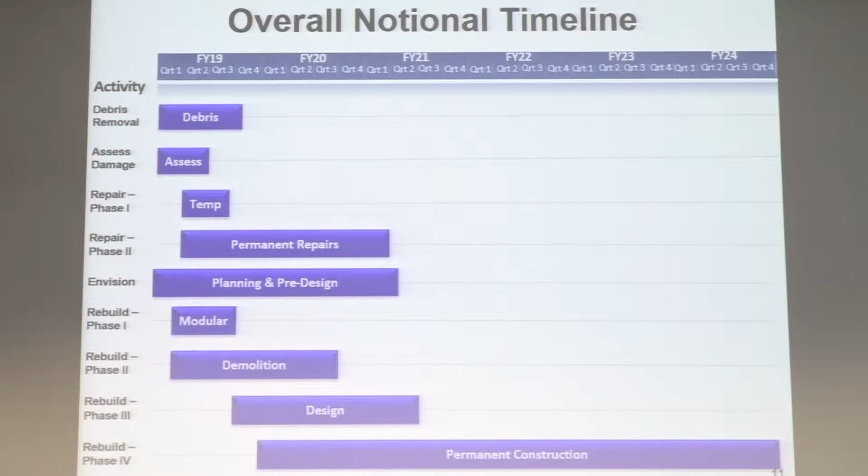So how are we getting to all those missions Colonel Laidlaw talked about so quickly? We had some great response. I'll tell you, I see General Williams down here talking about what the first Air Force people did in the early days after the storm. He and I have been up on some high roofs, 2-story roofs in the AOC, to take a look at the damage ourselves. But it's getting out there and getting some temp facilities in place.

The Corps of Engineers through the Mobile District has been a partner hand in hand. We've got more modular facilities showing up on the base. The first round is about 62 units. We've got another round coming in - rounds 2, 3, and 4 - as well as we're looking at some unaccompanied housing, and I'll talk about that a little bit more later.

For the next 2 years, we're going to do permanent repairs on some facilities. There's a lot of uncertainty still as we master plan about how many millions of square feet, but give or take, we've got about 4.2 million square feet on the base. 1 million of it's under permanent repair, and I'll talk about what that means today. But that's not done because there's still some work to do there. We think a lot of that's going to happen through the O&M realm, and I'll talk about what I think those numbers are today.

As we roll out, and you'll hear Amy Vanderveer talk about what the master plan envisions, we think that effort is already started, but that's probably next year or two, getting some of those designs in place.

One of the nice things about the Air Force Installation Mission Support Center and the Air Force Civil Engineer Center is with our global perspective and our ability - we call it the enterprise - we already have the expertise, and we're building F-35 facilities. We've been building them now for probably 5-6 years around the Air Force. We've got bed downs ongoing up at RAF Lakenheath, and construction going on in the winter up in Alaska. But we cannot use the same facilities we built up there down here.

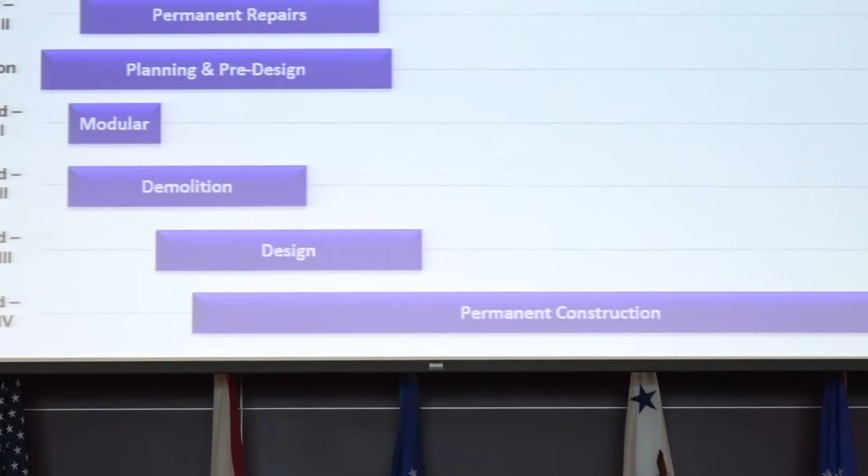Additional modulars, as I mentioned, we're trying to get those in place because today we relocated. We're working out of what used to be the Airey NCO Academy. They've relocated for a short period of time, but they want to start class again in about 18 months, so that means we've got to get that building repaired. The roof is leaking - every time it storms, we get a different place, we patch it, and it comes up someplace else. But we're moving into our new digs probably the next month or so.

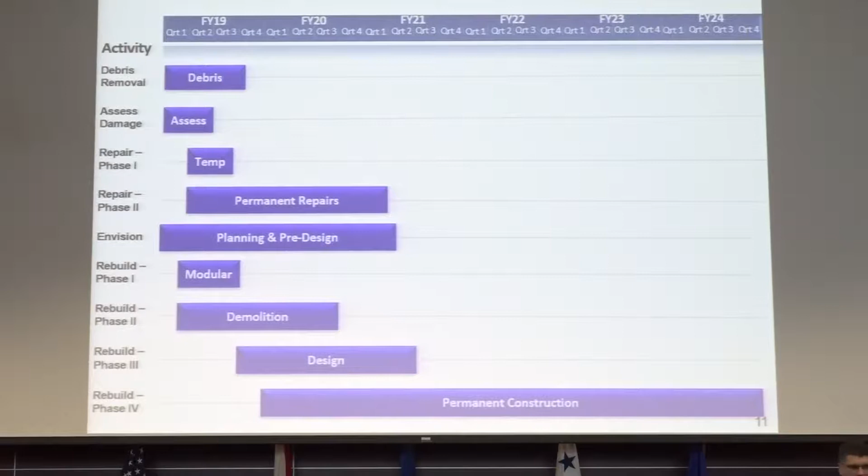For firefighters, we got to the fire department - their building took a lot of damage and they had no bunks, so their first bunk rooms were turned over to them last week. So they're able to have a good place in a modular facility for probably the next 3 to 5 years until we get the new facilities built. Demolition - you saw some of that video footage, and I'll show you some pictures here.

Some of them were already taken down. I would say the first building's already been demolished, and we had to pick it up to have a WEG mission started. The first building is going to come down. The next vertical building that's damaged will come down on Monday. The contractors are on site this week. We look forward to taking the wrecking ball, if you will, to that first facility on Monday or Tuesday.

As we get into the long-term design, that's going to be really the rebuild effort for the F-35, potentially MQ-9, and then the many different concepts we have out there. For example, you saw the dormitory complex. It looks okay visually, even on the video footage, but you get down inside and those rooms are completely molded out. We had the heating and ventilation system up on the roof. Those pipes are scattered. Once you lost the building envelope, and many of you know this, once the water got inside and we could not condition the air anymore, it was a losing battle.

And we picked which ones we thought we could get after and save. And even now, coming back and looking at some of them, we were at some tear out, and I'll show you some photos. We thought we could save it, and it's a gut and plow under. So we fight that every day.

Like I said, this plan is good as is, and then the overall construction. I've been saying everyone wants to know what it's going to cost and how long it's going to be. Right now, I think our best estimate that we have where we are today, it says this is in the $3 billion-ish price range, and we think 3 to 5 years.

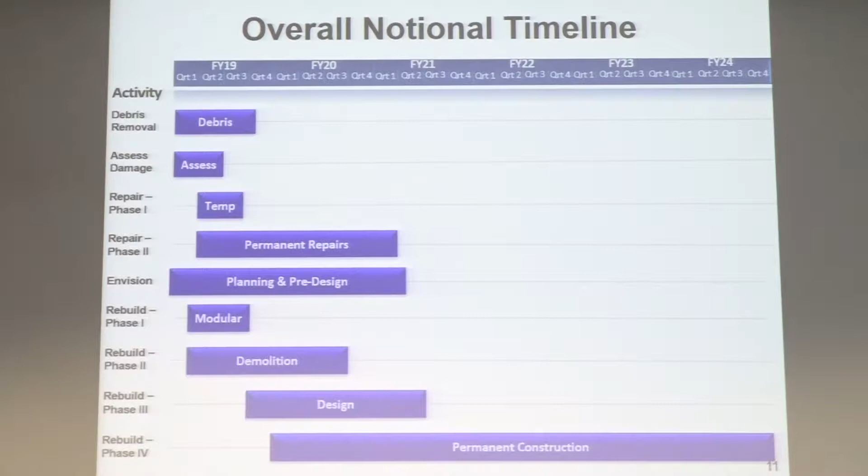How many folks, anybody here on Facebook? Yeah. About a week ago, it may have been 10 days ago, I got this Facebook, pushed me something, and it said Paris 2024 for the Olympics. And it said we are 2,024 days away from the start of the Paris Olympics, and we're getting started. And I go, wow, that seems like a long way away. I mean, I know all that effort that goes into getting those Olympic venues together, the construction, the infrastructure, and everything that has to happen with that.

And then it hit me. The first F-35 is going to be here maybe a year before that happens, and we haven't started this effort yet. So as I think about the magnitude of the effort that we're talking about to rebuild Tyndall, this is going to be an Olympic-style event. And that end date is firm. We're not going to be able to boost ticket sales one way or the other. When the aircraft arrive, the facilities need to be ready, the infrastructure needs to be ready, all at the same time while we're operating the missions at Tyndall today to meet its mission. So that's going to be the challenge that we have to face. But it's an exciting time, because I'll tell you, as an engineer, I love solving problems.

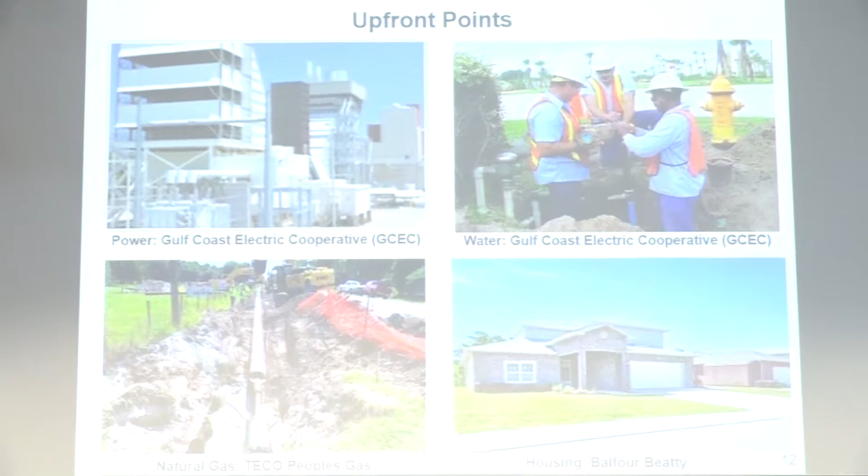A couple of points about the base you need to understand. As I learned as I came down here, the utilities are privatized today, so power is a privatization, gas and water, and then housing. So we're not going to talk about those today. Most of the stuff we're going to talk about is the vertical construction and some of the horizontal.

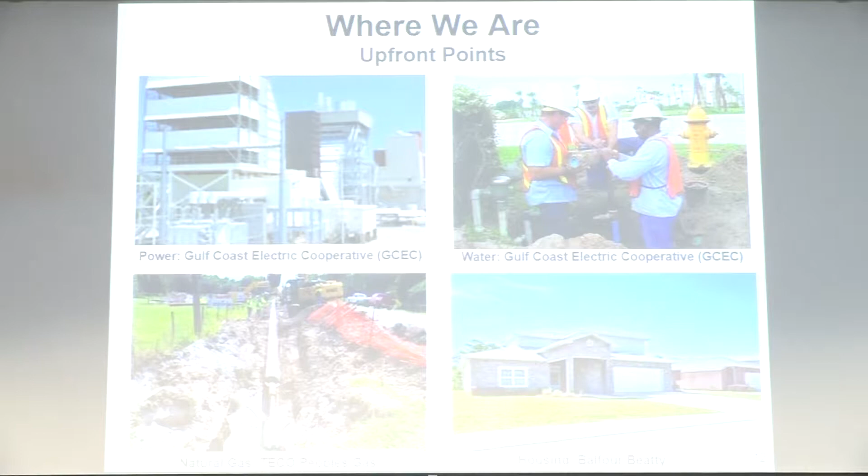Overall, the airfield pavements themselves are in very good shape, but there are some opportunities and things we need to look at. For example, drainage is one thing that we're going to look at. We're finding even with our roofs, once that material started blowing around, a lot of our internal roof drains got clogged, and now we're fighting those battles in 1st Air Force and other places that we didn't need.

I should have put the video in here. Probably about a month or so ago, I got this phone call. It was a Saturday, they're out. We had our inspectors out checking work, and I get this, hey, you need to see this. Apparently one of the roof drains clogged on the club. The entire roof structure, this awning area, essentially became a swimming pool. And it rained out of the hole they punched in it for 15 minutes. They estimated it was probably 40,000 gallons of water that were up on the roof. Fortunately, nobody was underneath there when it gave way. So those are just another sampling of the problems we have.

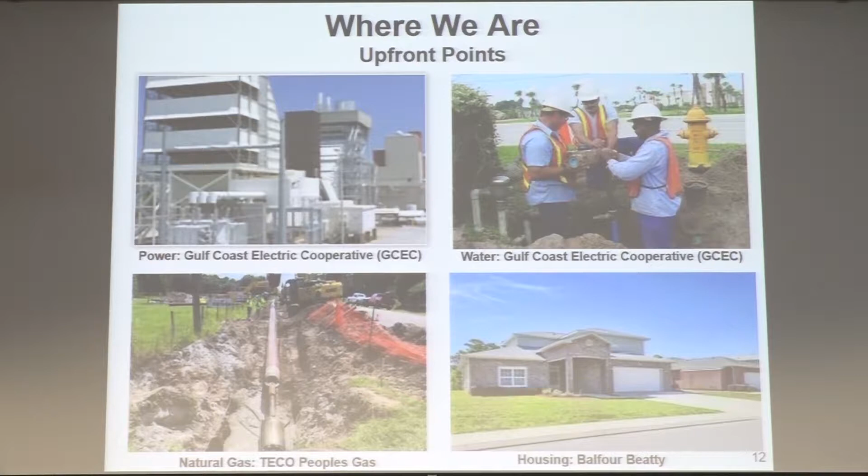Next slide, please. So I mentioned the task force, I'll just hit this very quickly. Task Force HARP was another one. It was housing, assignments, relocation, and posture. Another support from AFIMSC, that was Colonel Seth Frank who came down here. They have been helping with the personnel side. We also had the housing piece, Major Sam Logan and Colonel Mike Beach were here helping solve both the accompanied and unaccompanied. So they're working through this. I think Task Force HARP stands down on Friday, after that initial push, but looking at all those assignments and getting the people where they need to be and all the assistance as you take care of families and airmen. So a great job they did there.

Next slide. And then Task Force Phoenix.

You saw the picture of Pat Miller in the video. He got here, boy, I think it was within 10 days of the storm, sat down, and their focus really was to assess, determine, and preserve. They got that firmly underway.

Looking through some of that, I'll talk about the determination piece and how that continues to change. The assessment's pretty much over, and we still are battling preserve every day. Just this past week, we had more roofs, and I see some of my teams in the back there that are overseeing some of the contracting actions today, but it is a battle against time. And we're really getting after it.

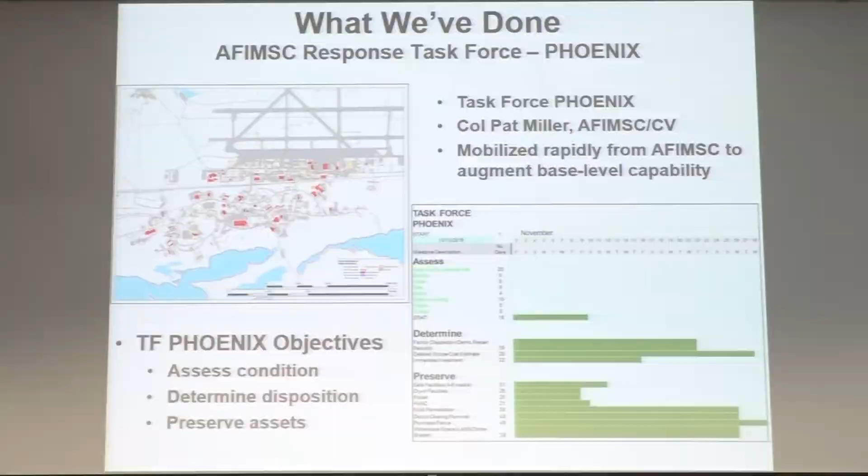So we went up there, we tried to find a way to capture it. If you've all been to the Capitol, many of you, and look at the Capitol Rotunda from the bottom floor all the way up to the dome, we'd fill that 16.5 times.

There is a shredder running seems like 24/7 out near where we live, just shredding trees to get it into mulch. We've partnered with DLA. DLA has already started to take off the steel. You saw in the video that it went down the flight line initially. Those were the sunshades that were out there laying down there. But we're going to reuse that, recycle that steel and try to bring it back for another purpose.

But there is just a considerable amount of debris, and there is still a considerable amount in place with buildings collapsed on themselves that we're just getting after to reshape the landscape so we can get a clean slate, if you will, to start building out the rebuild.

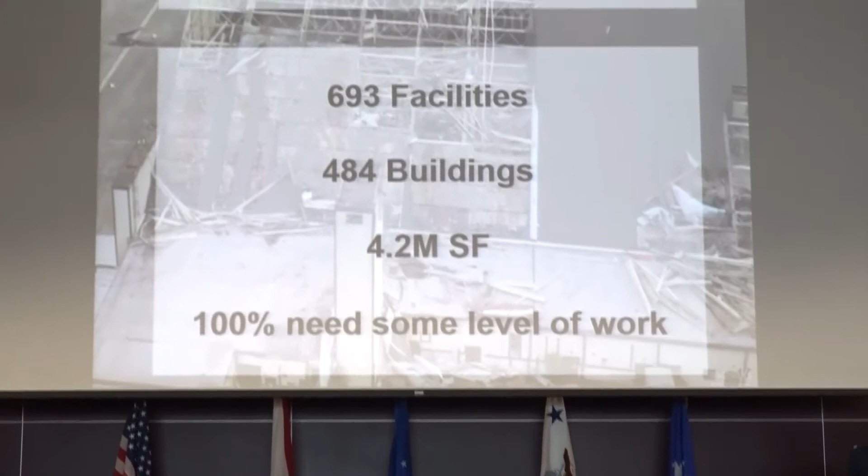Next. So what have we done? This is the size of the numbers, so those aren't additive. As the Air Force categorizes what's a facility, what's a building, facilities will also include things like an awning, it will be a pad, these kind of things, but overall vertical structures is just under 500 of them for 4.2 million square feet.

The one thing that I was not prepared for when I came down here was the fact that every single one of those buildings needs some level of work, whether that's demolish, a paint job, a roof. You think of the traumatic event that occurred, and you can see the twisting of the trees and the way the wind swirled around.

We're up in the control tower. Control tower has got this glass in it that's probably about an inch thick, double paned. There was debris that punctured through both levels of glass inside and then broke out the inside panels on the inside of the control tower, and that place was full of water. We are working to get that back. It's a critical facility. We got to get there, and long lead item, the glass. But we're getting after it.

But you can't understand what that did and kind of twisted. Even some of the buildings out where General Williams are, you can see the corners of the building just slightly twisted enough that it's cracked the facades of the thing. Some of the roofs are slightly off kilter. Some of the buildings completely gone.

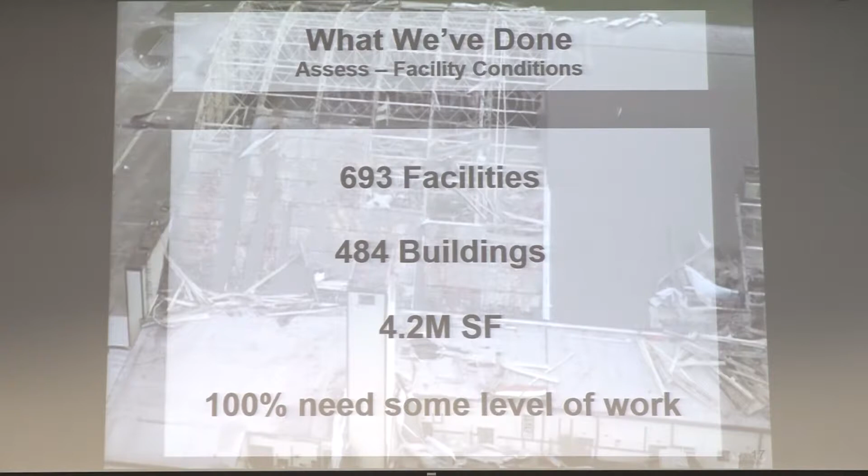So as we get through this, think about that, and that's why we're trying to take a really deliberate approach on what gets demolished, what doesn't, what can we fix.

But as we get in, and I liken it to surgery sometimes, as we peel back the walls, we're finding more and more stuff that we didn't anticipate in the initial look when we did the damage assessments. And you don't find that until you get in there. But the team's after it, and we look forward to your ideas as we help solve that.

Next. So where are we and what have we done for assessment? I mentioned we brought in some industry. We brought in the FEST teams from the Corps of Engineers, and also our AFCEC CO team here at Tyndall.

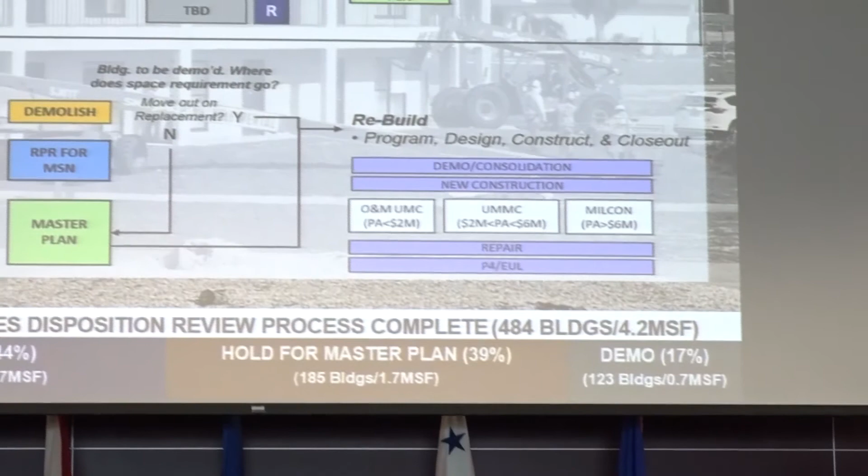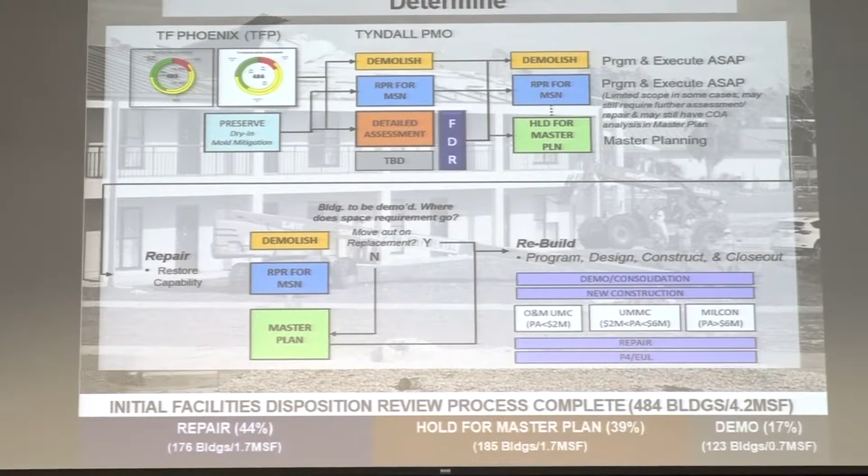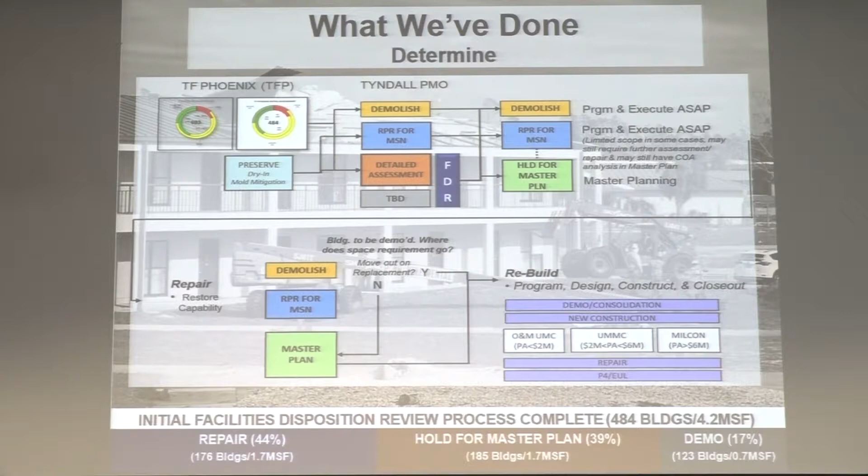That was a busy slide, but what I really wanted to come back to, if you start on the left up there, that's kind of the initial assessment from Task Force Phoenix, red, yellow, green, just bold at some point. As we came through, we realized that we needed an approach. It needed to be repeatable, something that every single facility went through the same process to make sure that we were making the right and sound decision.

We knew we wouldn't have the end state, but you can see some of the things we were looking through there. We're either going to demolish, we're going to repair it for the mission, we need a more detailed assessment, or something else. And so we created this thing called the Facility Disposition Review, FDR.

We got a picture of FDR in the office. And we wanted to go through every single facility and bin it again because things had changed. So you can see we have 3 categories now: demolish, and we've already made those decisions through the facility board with Colonel Laidlaw, those we recommended for demolition. You have the repair for the mission, and we have about 1 million square feet that I mentioned already underway. And then this thing, hold for master plan.

So as you come down here, we'll figure out the best avenue to get after that, and some of that on what the authorities that we're going to use, and maybe some of the new authorities that we have under 2854 is a potential. It all depends on the dollars that we get, the timing of the dollars, and bringing back some of the missions.

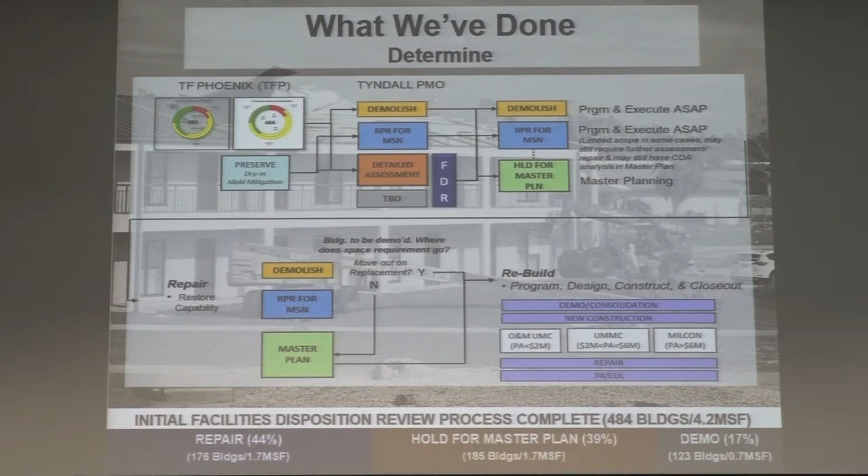But you see that bottom, that's really the takeaway from the slide right now. We think about 44% we're recommending for repair today. That was going into the master planning effort. Almost 40% we're holding for master plan, and you can kind of see on the bottom right here, about 17% for demo. I will tell you, based on our initial assessment in the first 2 weeks, this number is heading that way.

As we looked at the support side of the base, there's not a lot salvageable, and we'll see some of the pictures on why some of that's not there. Consolidation opportunities—Colonel Laidlaw mentioned the gunnery range in World War II. Some of those original buildings are still here. We got some 1943 vintage single-story World War II facilities that didn't ride out the storm so well.

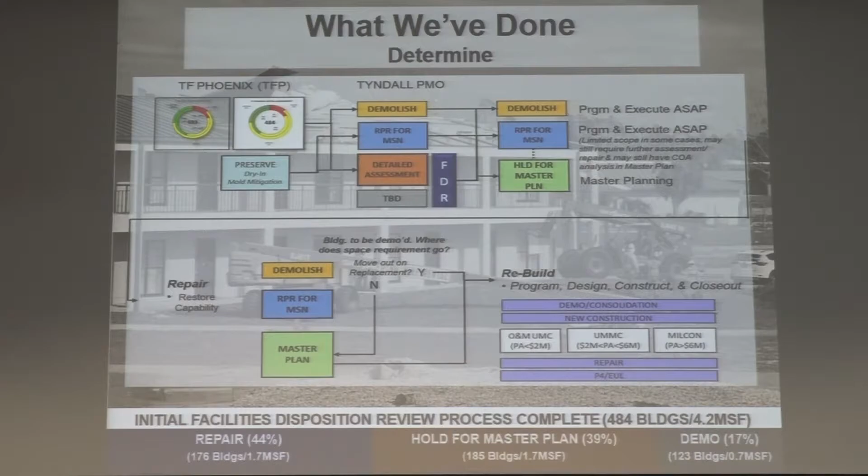So I want to give you just a little taste that you could see from the video. This is an example on the flight line, the combat archer building. Initially we binned it as yellow, potentially savable. You look at that and go, really? Don't know—the walls were still standing, maybe just needed a new roof. We had to assess the systems. Currently today this is a hold for master planning, but likely going to be demoed as we go through.

Just a sampling, the building next to it, that's the WEG building. That we think we can save. We have it completely gutted right now, but now we're finding the roof is off kilter. And do we make that decision? Because part of this—if you think back to, I like playing with Legos as a kid and I still do with my kids today—these problems, it's all about phasing and timing.

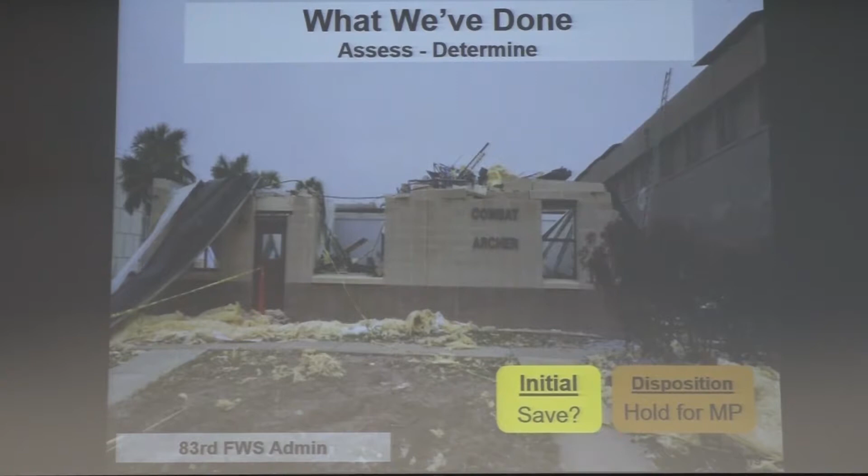Because some of these facilities, you can't take 4 million square feet of facilities that were used. Now you can say, was it used efficiently? That's a whole other debate. But we still have that mission ongoing. We didn't lose that many people or missions. And so how do you leapfrog around and get the right timing of getting people in a facility while freeing up space to demolish, while still meeting the mission and repairing it simultaneously? So this is the challenge in front of us.

So this one, we may use that building. We don't think we're going to keep the long-term building next to it, but we may use it for 3 to 5 years. So what minimum investment can we make in that building? I'll talk through some examples of those.

Another one down on the flight line, the AMF storage, potentially saved, but likely a hold for master plan—this one probably will not make it either.

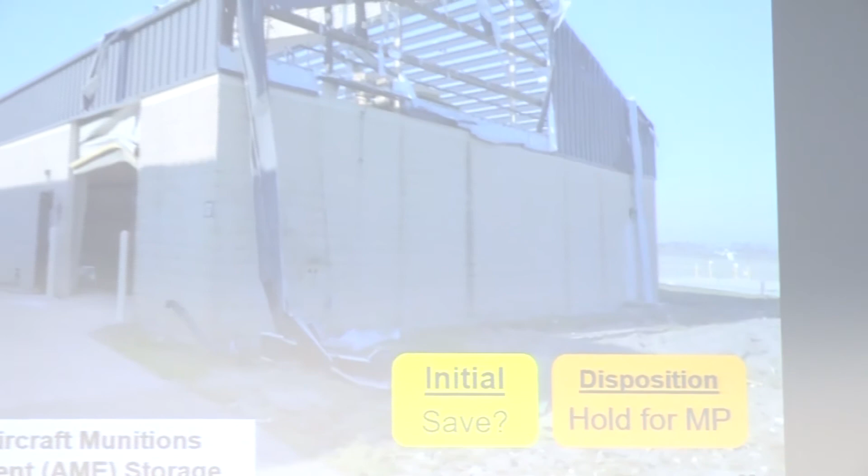This is the clean one, over to 8500. We do the subscale drone launch from here. You saw that thing taking off like a rocket in the video. This is their area—most of those were warehouses, just didn't make it at all. We had to clean up some of them because in addition, we had asbestos out there.

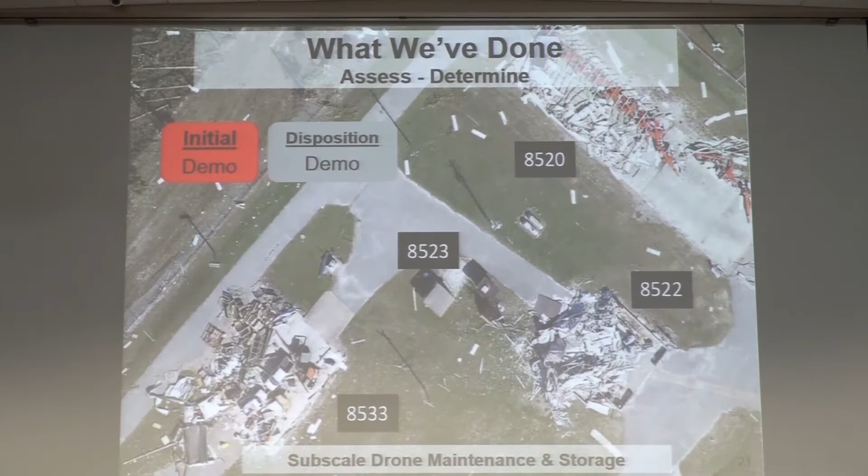We had to clean that up, contain it. We're looking at some temporary options out there now, with some temporary shelters to give them some workable space under cover for a while. But there's a whole area down here for redevelopment and consolidation of operations to make it a little bit more efficient for the organization.

Next. So what have we done to preserve? This is a good view. This is up in the control tower, up about 10, 12 stories, looking down.

That's the ops building. Anywhere you see a white-looking roof is a temporary, we call it TPO, covering to try to give us 12 to 18 months. So that's the clock we're under right now to get after these major roof repairs. And I think that's going to be the bulk of our effort for this O&M over this next year I'll talk about. We're also drying out that facility.

But you can see down in front, that is the RAPCON building. You can see part of the fire department over there. And you can just see in the background some of the other roofs that are completely gone, already peeled up. But those are some of the things we're getting after, the size of the problem.

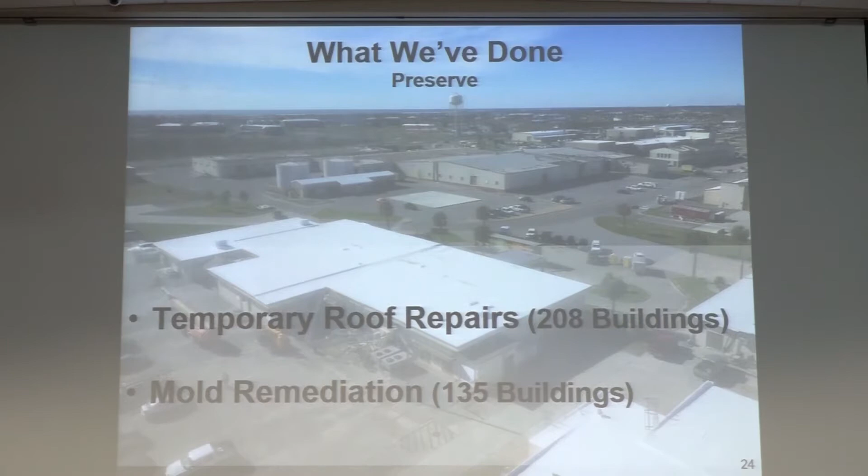So I don't know if any of you have seen mold remediation take place. We had great Americans in Tyvek suits, full respirators, on the floor with a rag in the metal channel of the studs, cleaning out every piece. And they'd wipe it, and they'd come up, it'd be dirty, they'd flip it over, they'd do it again. Until that came back clean, they would do that. After they went through once, they went through a second time to make sure it was good.

And then you saw a picture of someone painting. It looks like they were painting in the video. That is sealant to lock in, to make sure that if there is any mold left, which there really isn't when you see it, it's gonna encapsulate it and lock it in there so we know that it's been treated.

So I will tell you, after I see that, they go back in, they clean out the ducts of the HVAC system. These buildings are in better shape sometimes than they were before the storm because they're clean. And the systems are getting the overhaul. So a tremendous effort that we continue to get after this every single day.

Next. So the picture there in the background is a maintenance facility that does our low observable maintenance. Those of you who have ever spent any time with NATO, they have a term called minimum military requirement. Think about this like combat repair for a facility. We don't know the long-term state, even with F-35s, is a different type of maintenance, but we need this facility today to meet mission requirements for the F-22s that are flying at Eglin.

So we're taking an approach that we don't think this building is salvageable in the long term. We put a temp roof on it. We are doing mold mitigation in the back. We're taking other temporary measures.

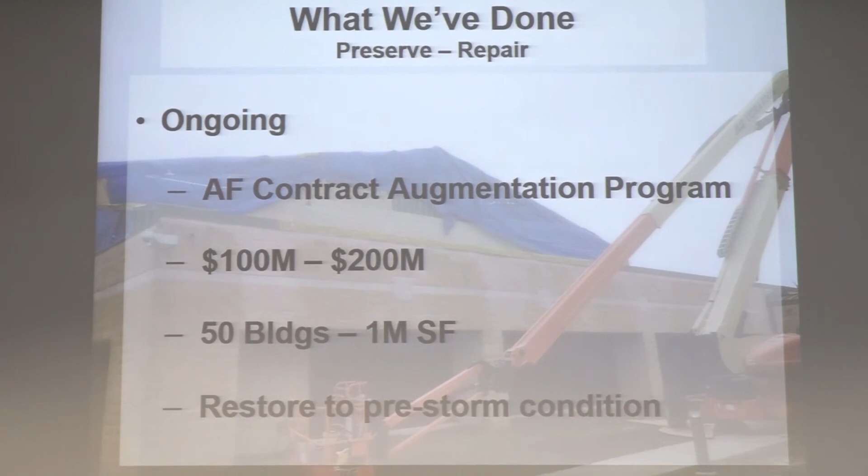But even restoring these to pre-storm conditions, where I see some additional work is if we decide to do code upgrades, which we are. We're talking internally now about what standard we're going to go to. Right now, most of the buildings are rated to, I think, the 120 to 130 mile an hour range.

Miami-Dade is 180—we want to get down and see the Miami-Dade Airport standard. We also want to go down to the Keys; I think they're down in the 200 mile an hour range. So what code are we going to go back to? Do we make those upgrades on the buildings we're going to keep? Because some are going to need new roofs, like I mentioned, and we'll need anti-ballistic, or hurricane-resistant, glass.

We've walked around the community a little bit. I won't say the name of the company publicly, but they had just built some new properties on 23rd Street, and those survived the storm. They were open very quickly after, so we're understanding what some of their design standards were. Talking to some of the people that worked there, the building had only been open about 6 months.

3 or 4 days before the storm, corporate sent a team in and put the shutters on to keep the debris from going through, and the restaurant survived very well. The only reason they couldn't open earlier is they didn't have power. So what can we learn from others that have already done some things?

But the next piece of this presentation, I think, is key—Amy's going to talk to you about what we're thinking for master planning, the work that's already underway, and some of the ideas and principles we want to incorporate to have Tyndall really be our first 21st century air base. Thank you.